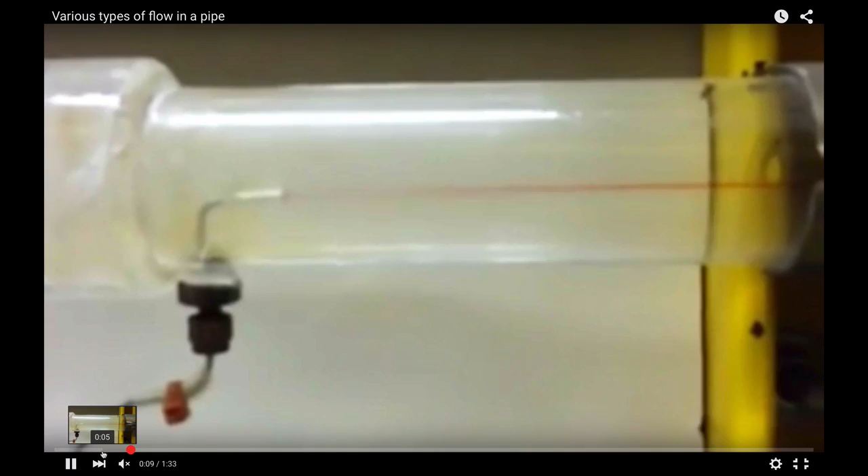Today we'll talk about pipe flow, which is what's going on in the background here. If you look at flow along this pipe, initially the flow at some velocity is laminar—sheets of flow sliding next to each other, uniform in the center of the pipe. As you increase the velocity and get further downstream, you get little wiggles in it. This happens because the velocity is increasing and the flow is going from laminar to a higher velocity, and therefore a higher Reynolds number, at which point it transitions from one flow regime to another.

And so that's what we'll be talking about. We'll be using the information you've gathered over the last two weeks, which I think covers two particular areas.

The two particular areas are the energy equation, which is a modification of Bernoulli, and dimensional analysis. We'll use both of these concepts today when we talk about flow in pipes, to develop expressions that let us solve for what power you have to put into a pipe network to get a fluid from the Gulf to someone's kitchen in New York City—what kind of energy you have to put into the system to do that.

So let's talk a little about this. We are in week 10. This is pipe flows. But first I just wanted to recapitulate—which is what recap is short for—on the two things we talked about.

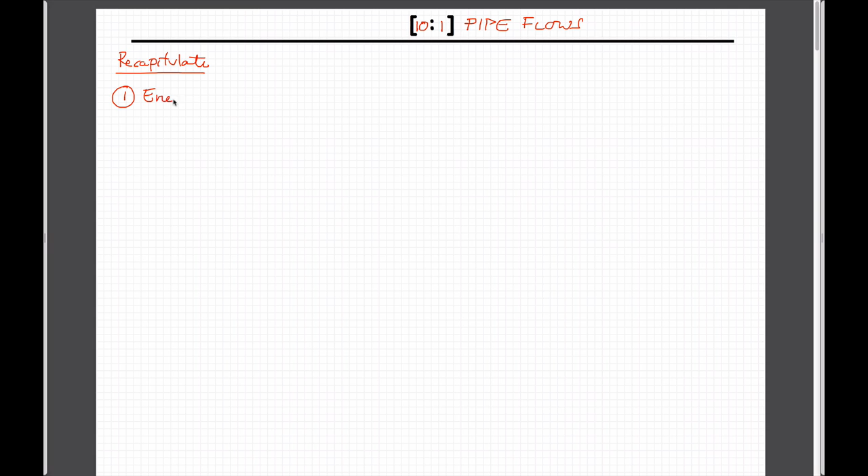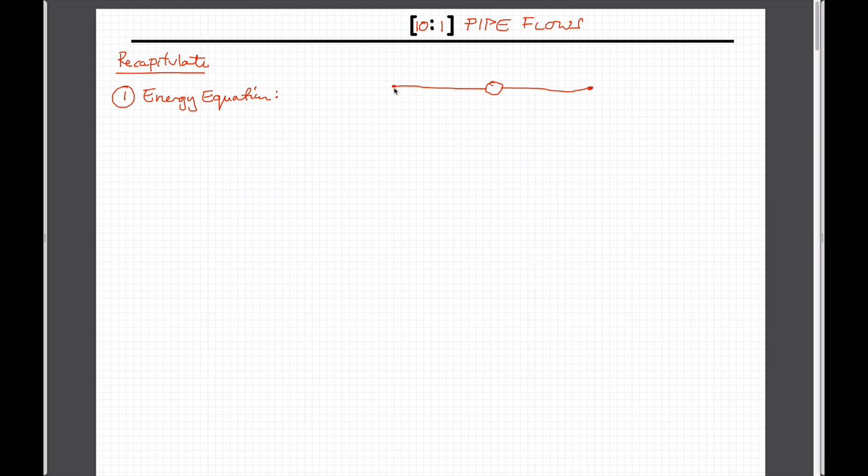The first is the big picture: the energy equation. It comes in a variety of forms, but the one we'll use most usefully is to go from upstream to downstream. Of course, the pipe network could have all kinds of things in it, like a pump, as it goes from upstream to downstream. By convention, I always have flows going from left to right—I don't know why, but I do. And the idea is simply this.

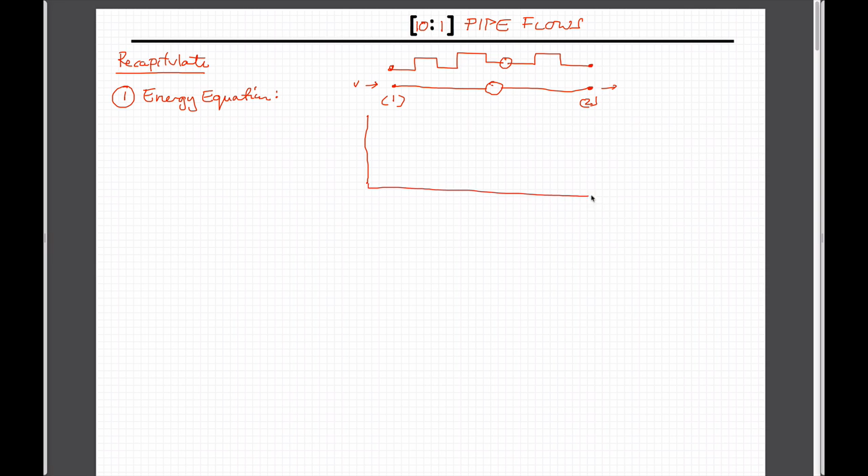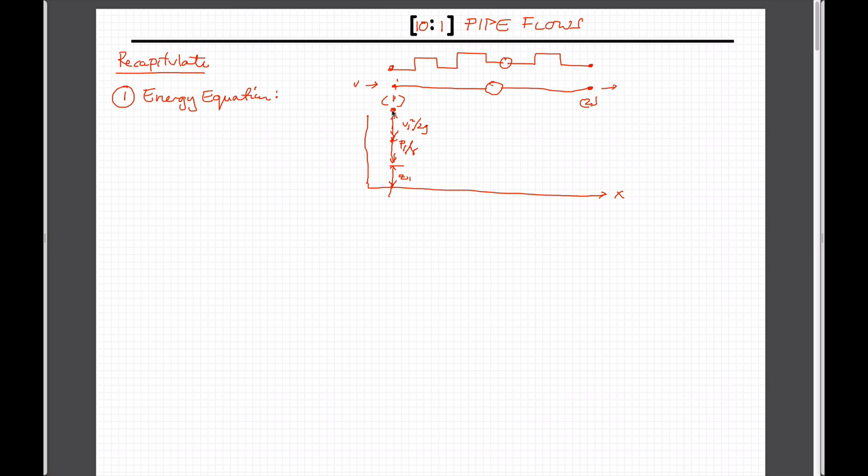We talked about this concept before. If you look at a length in the x direction, at this point there is a portion of the pipe which is an elevation, a portion which is pressure head at point 1 over unit weight, and a portion which is velocity squared—v1 squared over 2g. We know all these terms are units of length, and this constitutes Bernoulli's expression.

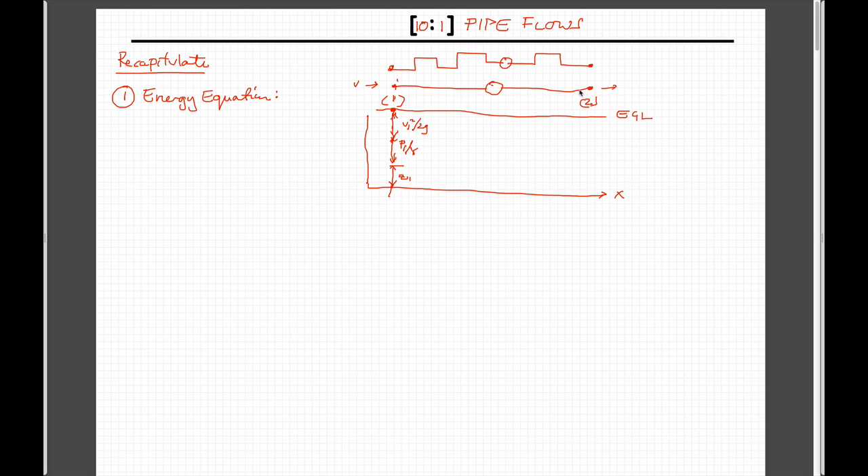We talked about having an energy grade line, which is constant in magnitude. Now if we come to this downstream point, the elevation will be the same magnitude, Z2. The pressure may be different, presumably so if it's flowing left to right—P2 over gamma. If the pipe is the same cross-section, so V1A1 equals V2A2, and both cross-sectional areas are the same, then both velocities have to be the same. So this height of velocity has to be V2 squared over 2g, and this length and height have to be the same.

But if we're pushing fluid downstream, we're losing pressure as we go from upstream to downstream, so P2 would be less than P1. The missing component in this is what we've called the loss. That's the graphical view of this. So if we write Bernoulli's equation as we now know it: upstream elevation, upstream pressure, upstream velocity.

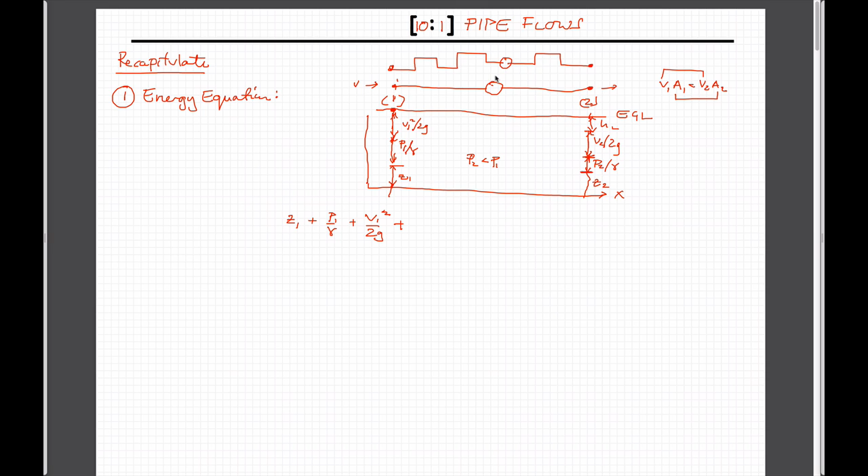We can put some energy into the system with a pump. The units of this have to be head, just like all these other terms. And if we look downstream, it's just the continuation of this: P2 over gamma W plus V2 squared over 2G, plus the sum of head losses.

And so the graphical explanation of these are frictional losses. So these are what we'll refer to as viscous losses.

That's why people put friction reducer in well bores, so that the pumping you apply at the top of the well bore when doing a hydrofracturing job is manifest at the bottom of the hole, instead of all being eaten up physically moving that fluid at relatively high velocities along the downstream portion of the pipe. So if you can reduce the friction, reduce the viscosity, you get much more pressure downhole, and therefore much more bang for the buck in some respects.

But that's physically what it means. And we won't talk about what HP will do here. I guess it would change the form of this grade line, but let's not worry about that.

So that's the first thing relevant to what we've done. We've solved for energy, and now for the first time, instead of dealing with Bernoulli's equation, which is inviscid—remember that Bernoulli is inviscid, in other words the viscosity is zero—by adding this term, we can allow for the fact that viscosity is no longer equal to zero.

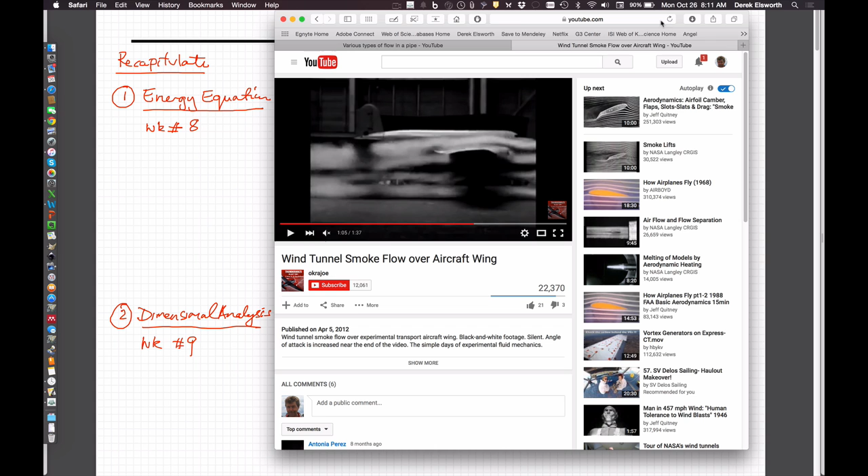And of course, dimensional analysis is this incredibly powerful method by which, if this works—this is one of the movies that maybe you looked at—will it refresh? Is that you can put a structure, so you don't need to solve any equations to figure out exactly what the forces might be on a structure. But what you could do is an experiment by towing a ship in a tank, putting an airplane in a wind tunnel, and being able to measure some forces on it.

So in this case, maybe with the air flowing past it, there are two things we'd be interested in. The first is that the flow patterns around the wings—we'd like to have the same flow patterns around the wings in this wind tunnel as happen in real life. And so there's something called kinematic similitude that we want to guarantee: exactly the same flow patterns around them.

And if that's the case, then we could measure the forces applied on this plane, either in lift or in drag pushing it down the tunnel, and be able to scale those up to the fact of a full scale. I don't know what scale this model is, or whether it's actually a full scale plane. We could use it to be able to scale what the forces would be in reality applied to this.

And so we don't need to solve any expressions to be able to do that. We can just use this quite incredibly powerful technique called dimensional analysis.

And I don't know if you can hark back that far in our past, but the very first time we met—actually the second time we met, I think on the first Wednesday—we talked about using Bernoulli's equation, and we talked about taking some of the individual components of that. We talked about taking these two components, and I'm going to mark one of them to put it on the top.

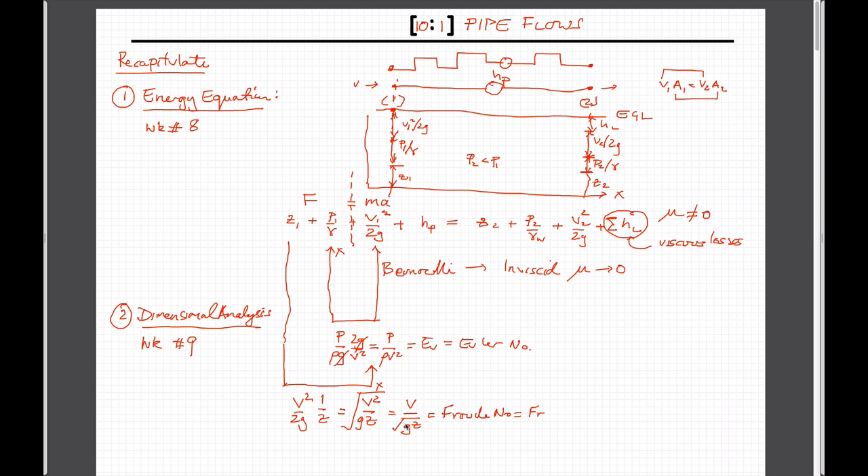So those are two of the terms that we'll work with. The other one is not so easy for us to do. If we take this inertial term and go over to this term here - not a very straight line - this is an inertial term, and this is viscous losses. The other expression we've talked about in this class is the Reynolds number, after Osborne Reynolds.

And the Reynolds number is the ratio of inertial to viscous forces. So we're still recapping stuff from last week - inertial forces to viscous forces. We don't really know what these viscous forces are. We know that the units of this have to be units of length, but we don't know what the other components are. But we do know what these components are.

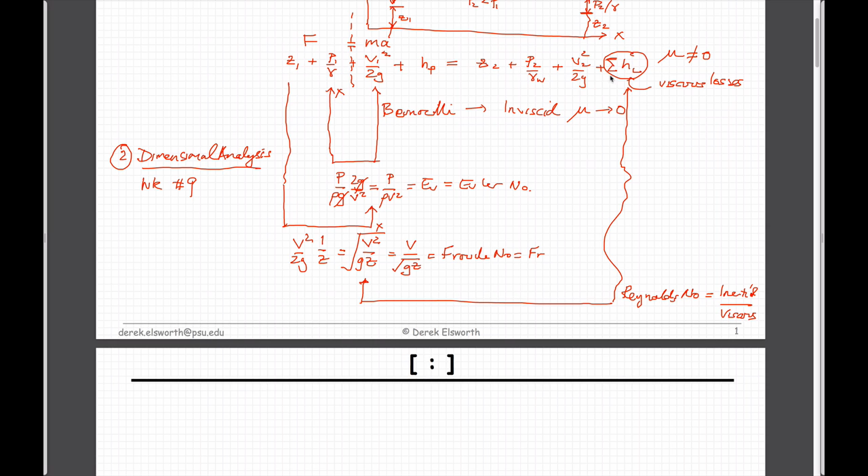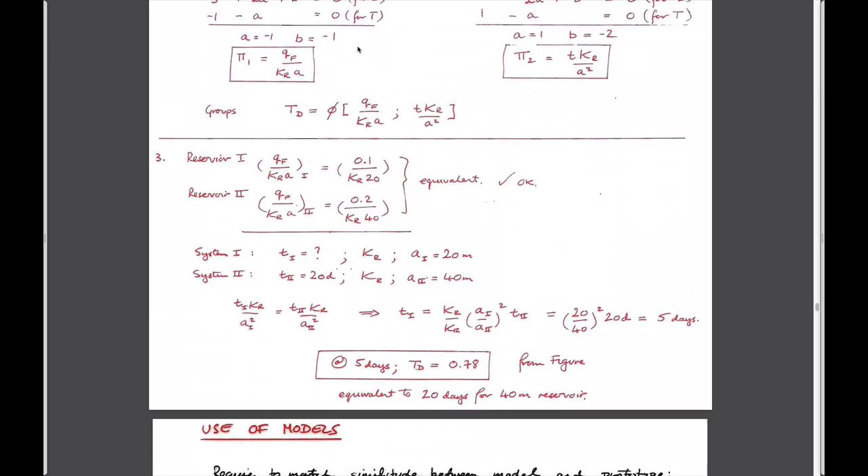So one easier way for us to do that is to just go back to here. Let's look at this - go back a few pages. More than a few. There, right there. Is this.

So we're interested in figuring out exactly what the Reynolds number is. We said that the Reynolds number is the ratio of inertia to viscous forces. The easiest way to figure out exactly what those are is just to look at what these would be.

We know the force due to inertia is F equals ma, mass times acceleration. Mass is equal to volume times density, by definition. We care about the units, not the specific components. Volume has units of length cubed, and acceleration is meters per second squared. So this is the product of a volume and an acceleration, and the units for this end up being density, length squared, and velocity squared.

If we look at viscosity, the easiest way to define it is through Newton's law of viscosity: shear stress is equal to viscosity multiplied by a change in velocity over a length. If we multiply both sides through by some area, then this now is also a force. So if we have a force here and a force here, we can divide those forces by each other. Taking the units, this is viscosity times velocity divided by a length.

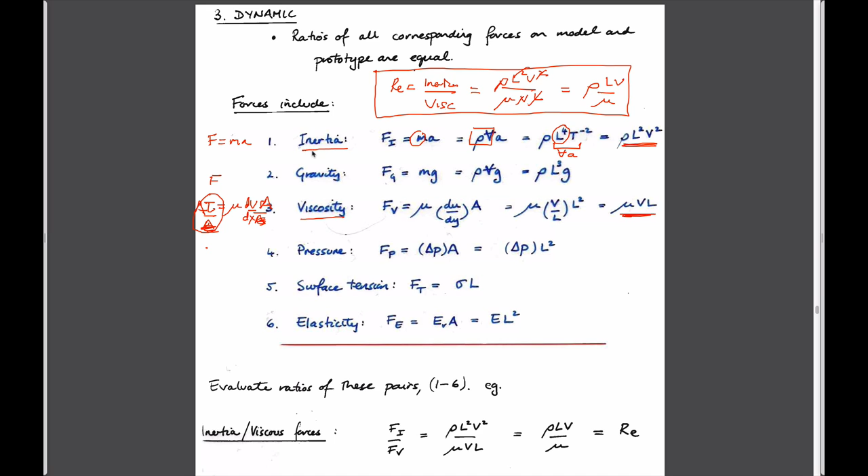So without going into much sophisticated detail about what H sub L is, we now know this other indexing parameter is just the ratio of the inertial term, v squared over 2g, to whatever the viscosity term is, which we've never really discussed in detail. It's a bit convoluted, but we can figure it out from Newton's law of viscosity. If we define these both as forces and divide one by the other, by definition a force over a force is dimensionless, and therefore we end up with the Reynolds number. So this is the other important number we have.

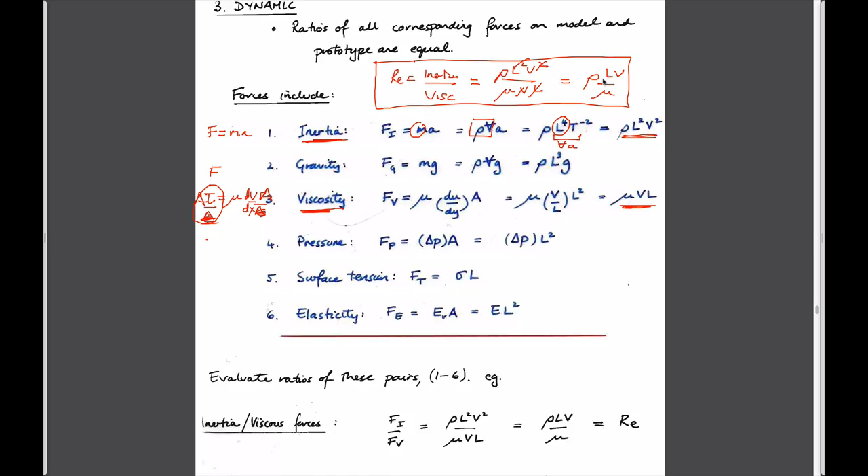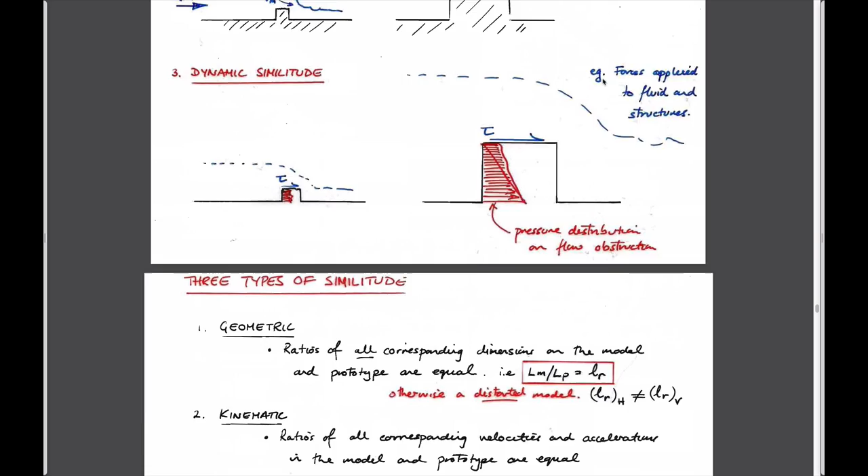So the final portion, maybe recapping what we've talked about so far — I'm going to use the figure we have here. We'll use this in our study of flow in pipes. To get any solution by this method of similitude, by running experiments in a wind tunnel — sometimes with buildings in it, sometimes with bridges to look at natural resonant frequencies like the Tacoma Narrows bridge, or to look at wind turbine blades, whatever you want — we have to satisfy three requirements.

The first is geometric similitude. In other words, the length to height ratio of the model has to be the same as the length to height ratio of the prototype, not protocol. If it's not, then it's not really a true model of what you're dealing with. You know that when you make a 1-to-50 scale model, everything gets shrunk down by that same dimension, and it looks exactly the same as the real thing but in miniature. So the model has to be shrunk in all dimensions the same as the real system.

The second is kinematic similitude, which means the flow patterns you get around it have to be exactly the same. First, you have the same shape, satisfying geometric similitude, because the prototype and the model are an exact scale replicate of each other. But now when flow goes around it, you want the eddies here and the eddies here to occur under the same conditions.

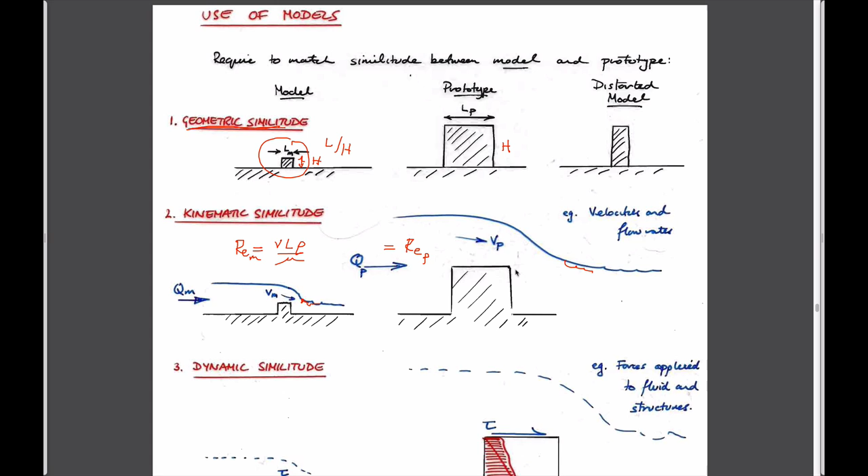In the model, that is satisfied if the Reynolds number of the model, which is velocity times a characteristic length times density divided by viscosity, is equal to the Reynolds number for the prototype. It doesn't mean all of these dimensions have to be the same, just that the combination of all those components have to be the same. If this is met, then the flow regime you have will be identical.

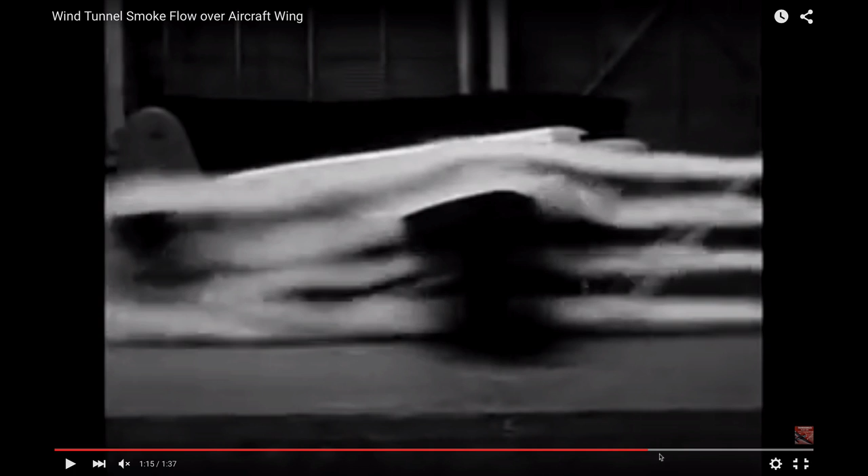Coming back to this pipe here, or this model here for that matter, let me go back to this.

So what this means is that the flow patterns we have going over this wing are specific for a particular velocity and the viscosity and density of the fluid, so it's air in this case. We could do this in water just as well, and so long as the Reynolds number was the same for this system in water or air, the form of these flow patterns around this wing would be identical. For that reason, we could measure the forces applied to this and use those to calculate the real forces applied on the structure.

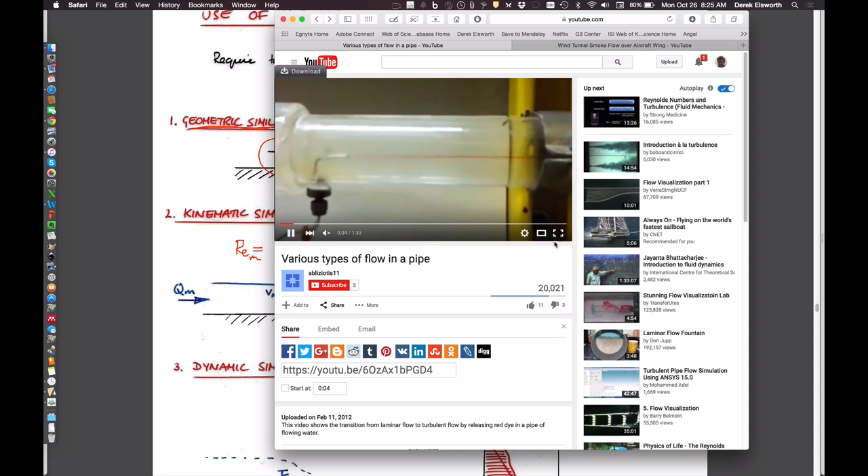Likewise, when we talk about this other case, let me go back to this one, since it's relevant to what we're talking about here. In this particular case, because we're talking about pipe flow, this flow is a laminar regime. There are no eddies, it's going at a certain velocity.

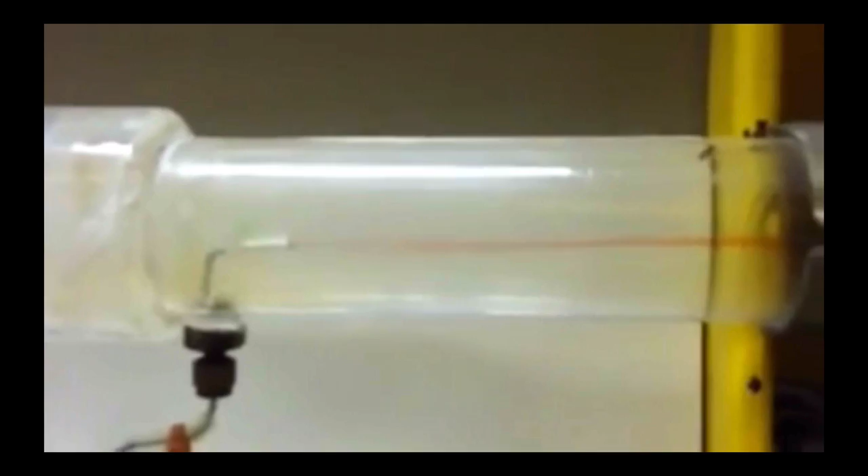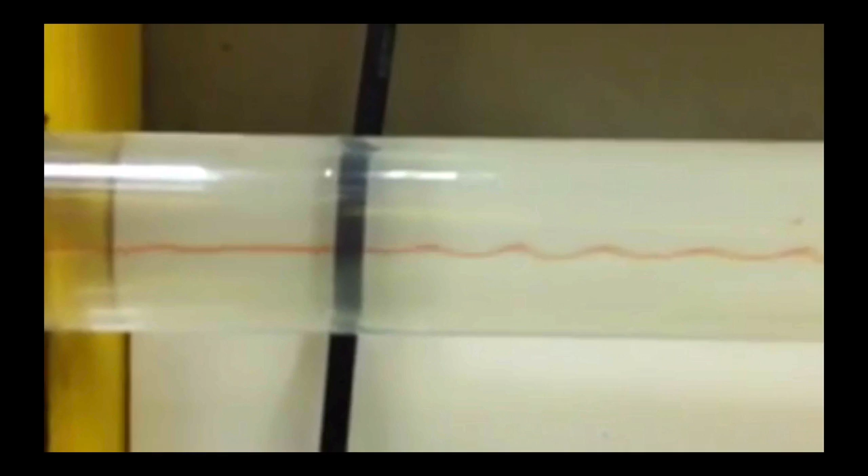Now if we increase the velocity, the Reynolds number is changing, because Reynolds number is a linear function of velocity. So the flow regime is changing. We might expect that the forces applied on the side of this pipe, which we never really think about since that's not what we want to figure out in pipe flow, would be changing because now the regime is changing. That's what we're attempting to do here.

So the final case: geometric similitude has to look the same, shrink down to the model. Kinematic similitude is the flow regime has to be identical, and that's guaranteed if the Reynolds number is the same. The individual length scale probably isn't the same because it's a model, and you could also use different fluids with different densities and viscosities, but so long as you scale the velocity appropriately to match this prototype Reynolds number, you have a match.

And the final one is dynamic similitude. Dynamic similitude says that the Euler number of the model, which we define as pressure divided by rho v squared, is equal to the Euler number for the prototype.

This is useful because now if we measure the pressure applied on this face, and multiply it by the area of this face, that equals a force. So if you measure the force, or measure directly the force applied to this block trying to move it downstream...

We could write this as: you measure the force here in the model. If you know the density, the velocity it's flowing at, and the area of this face, then because these are equivalent, this is equal to the force on the prototype divided by rho v squared times area, for the prototype.

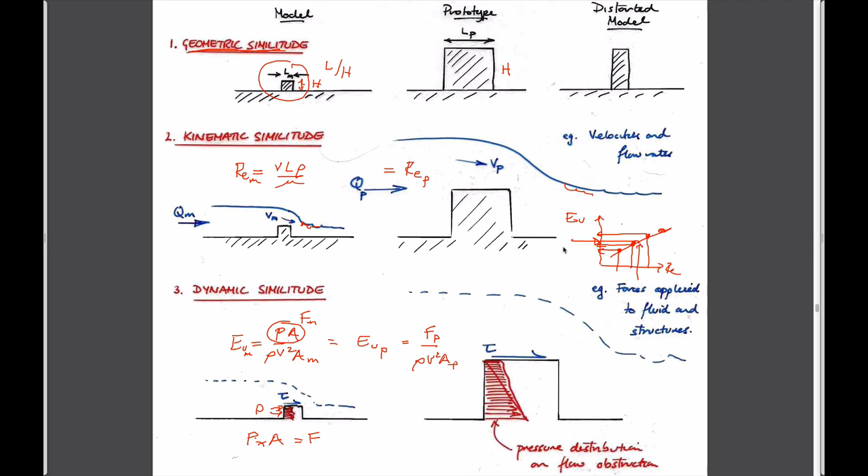That's it. So no equations needed, incredibly powerful technique, is used all the time because it deals with real fluids. It doesn't require that they be Newtonian fluids and satisfy Newton's linear law of viscosity.

Okay, so that's our recap, which perhaps took a bit longer than I wanted, but I think it's probably quite germane to what we're dealing with here. So what do we want to do now? We'll talk about pipe flows.

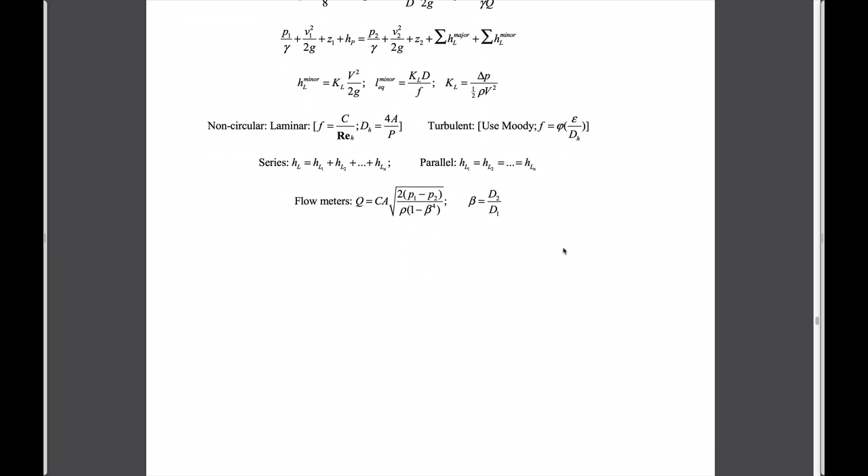So the last bit to tie this in together, and it does relate to this idea of dimensional analysis. What is a pipe flow, and how is it distinct from a storm sewer? It's important for us to realize that when we're talking about pipe flows, what makes a pipe flow is that the complete section of the pipe is filled with water.

And if that's the case, then it's driven by an upstream pressure, which is larger than a downstream pressure, which drives a velocity as a result of this.

If half the section of the pipe, or any fraction of the section, is filled with air, then it's no longer what we refer to as a pipe flow. It would be what we'd refer to as an open channel flow.

We can't now apply an upstream pressure here in the fluid and a downstream pressure in the fluid and sustain them, because it'll just short circuit through the air and we won't be able to sustain those pressures. So the only thing that will drive this flow in this open pipe, half section filled or three-quarter section filled pipe, is gravity.

So if it's horizontal, it'll be stagnant. If it's inclined, then it will be flowing. But the only force that's making it flow is gravity, the change in elevation between upstream and downstream. And that's different from pipe flow.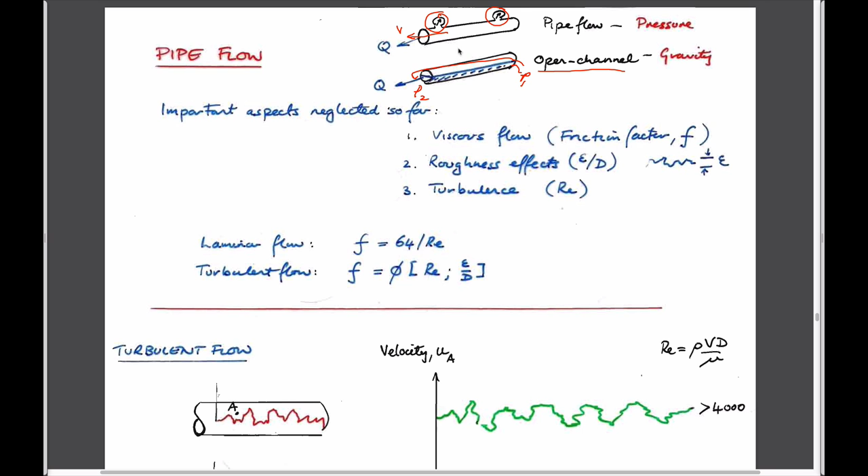So that's the one thing that's different for us, and we need to be able to account for that. Our interest in looking at pipe flows is to account for what is this head loss. This will be one thing that we want to figure out: what is this HL that we have to apply to be able to solve Bernoulli's equation for pipes?

How does it vary, for instance, with the fact that the walls of this pipe might not be absolutely smooth, but might have some roughness attached to them? We'll define this roughness in terms of some parameter which we'll call epsilon as a function of the diameter of the pipe.

And how, as a function of Reynolds number, which we know is a function of a velocity, a characteristic dimension that we can choose, and we'll choose that characteristic dimension to be the diameter of the pipe, a density of the fluid, and a viscosity of the fluid.

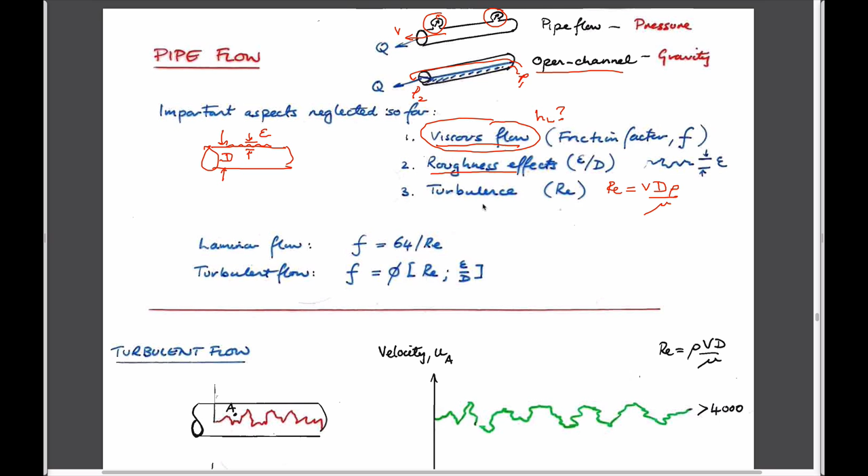How does this transition from laminar flow, where this little bead of dye that's going down the length of the pipe doesn't change? This was in our YouTube video. This was the first case at low velocities.

We upped the velocity, then all of a sudden there was a little jump and a wiggle in it, and if we kept on increasing the velocity, then it would get more of a wiggle. And we find out that this is indexed by this parameter of Reynolds number, which is this dynamic similitude parameter.

To get the flow regime exactly the same, we have to have exactly the same Reynolds number, not exactly the same velocity, but exactly the same Reynolds number. So that's kind of the big picture of where we're going.

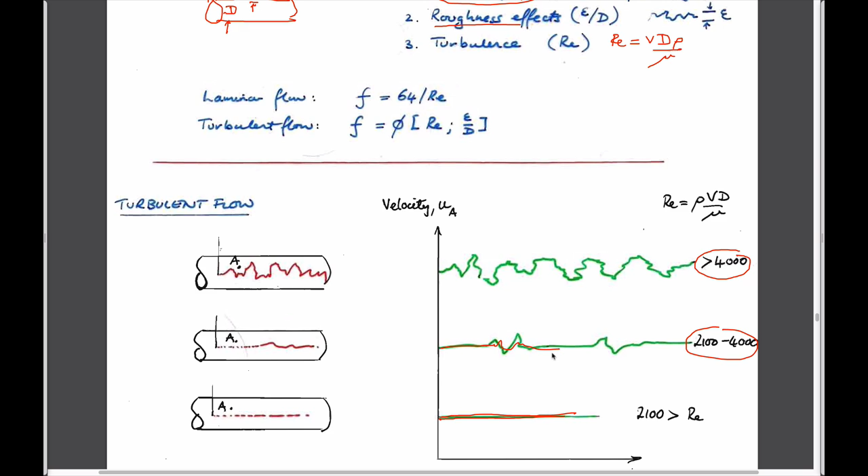I'll make one other point before we leave this, and I'm going to roll back just so I got a bit of place. So the big picture for what we're dealing with now for the next six weeks is we're going to talk about pipe flow, we're going to talk about external flows, and we're going to talk about open channel flows.

So with this territory, we can think of these as similar in some ways. If you think of pipe flow, we're often interested in looking at what is the velocity that flows through this pipe as a function of a pressure gradient, which would be P1 minus P2, the upstream, over a length of pipe.

And the flow is inside here. So you can imagine that since there's a change in pressure, P1 minus P2, and if we multiply that by the cross-sectional area of this pipe, that is equal to a force, by definition.

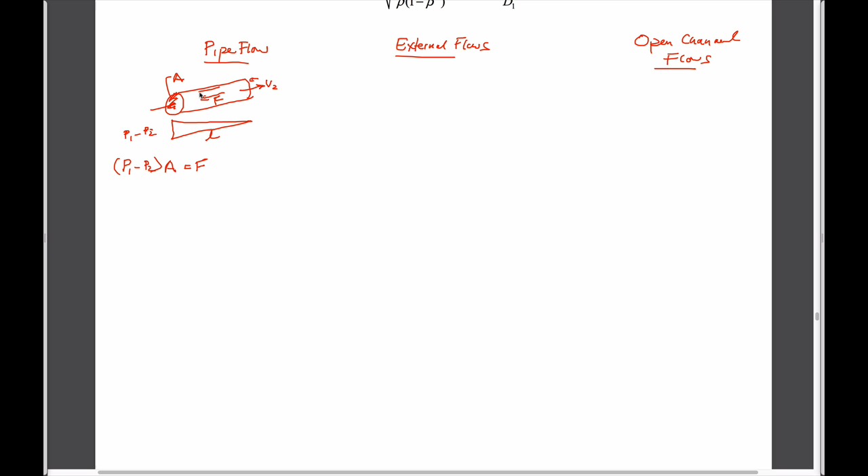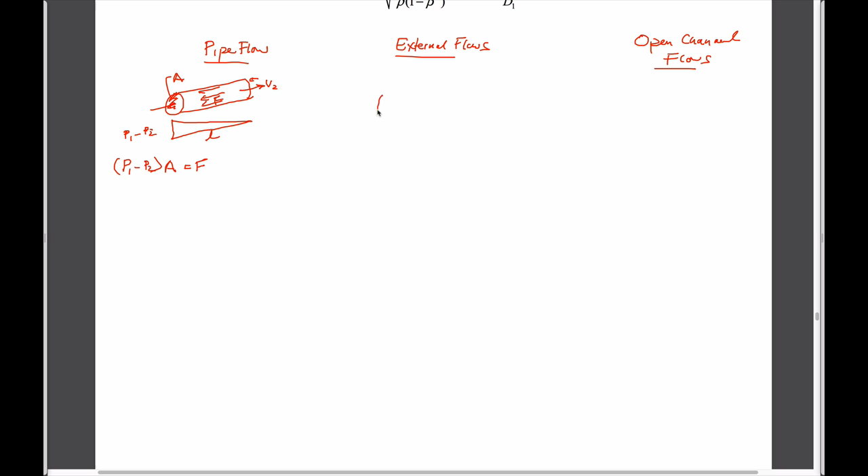And the reason we have to apply this force is because there are shear stresses that are applied on the side of this pipe which are resisting this flow. So to be able to hold this pipe in place, we have to think about the force that would be applied. If you think about it, if we're looking at external flows, this is now a pipe that instead of stuff flowing through it, we're going to close off the end.

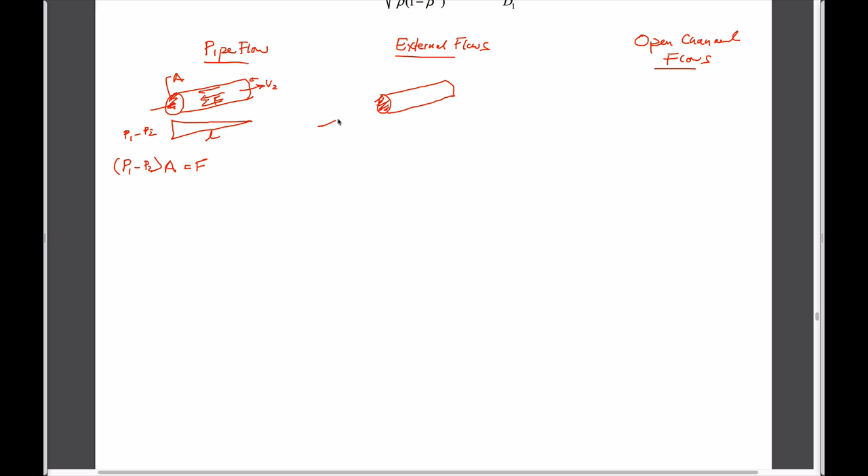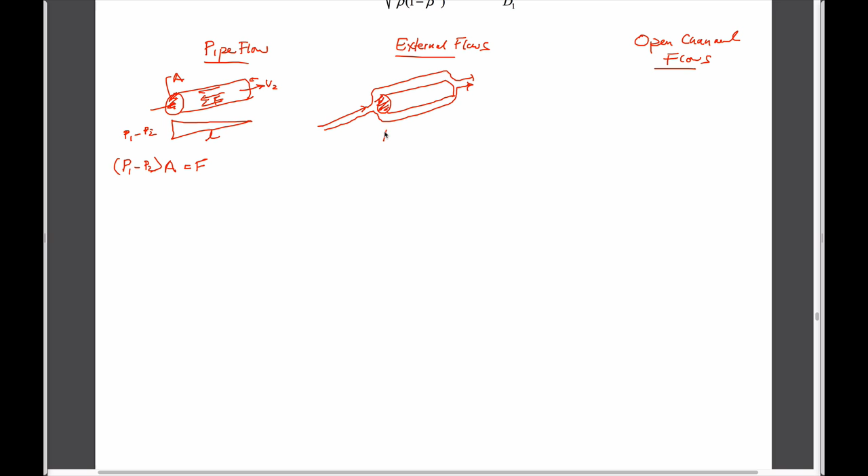If we close off the end, then the flow that goes down here has to go through a stagnation point around it and then out the other side, just like going around a wing. And maybe this is more apparent. There would be a different pressure here, upstream, a different pressure here, downstream.

And again, we can get a force that we'd have to apply to this. And the force is going to be equal to what? It's going to be the difference in those pressures, P1 minus P2, whatever those pressures are, multiplied by the end area. So it's actually no different from this. It's exactly the same.

So if we think about it, external flows and internal flows - we could call this internal flows if we wanted to - are really the same. The only thing is that we're interested in something else.

In internal flows, we typically want to know how much energy do we have to provide to be able to push stuff along the inside of the system at some given velocity.

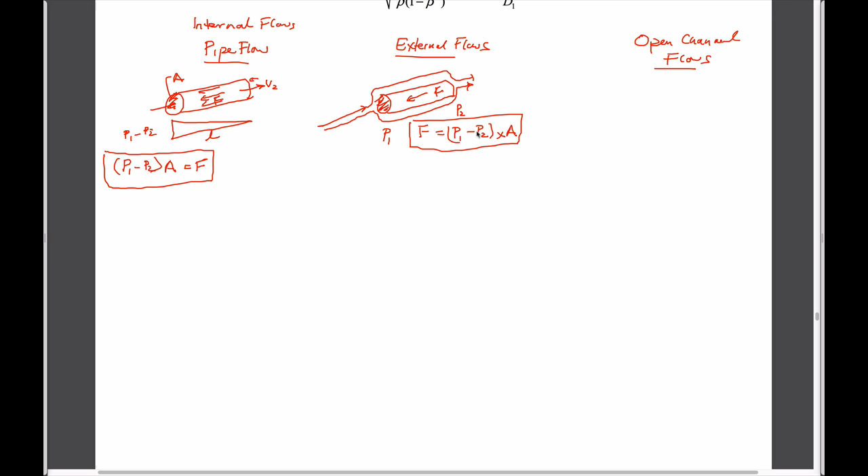In external flows, we're typically interested in if we have flow past this at some velocity, what is the difference in pressures upstream and downstream, so we can make it strong enough so that the water tower doesn't get blown over when it's sitting in a gale, which is really what's going on. And so we can apply these same things in terms of...

Dimensionless homogeneity. What did we call them? We called it dimensional similitude. We talked about kinematic similitude. And we talked about dynamic similitude.

So we can talk about the pipe first. So the pipe, what are our dimensions? We have a length to diameter ratio - we could think of as two length ratios. We talked before about the idea that we had a roughness here that we thought might influence things, and so we could also look at a ratio between the roughness and the diameter. These are both two non-dimensional parameters. They're both ratios of lengths, and therefore they have to have zero dimensions. And we could think of those as behavior defining the system.

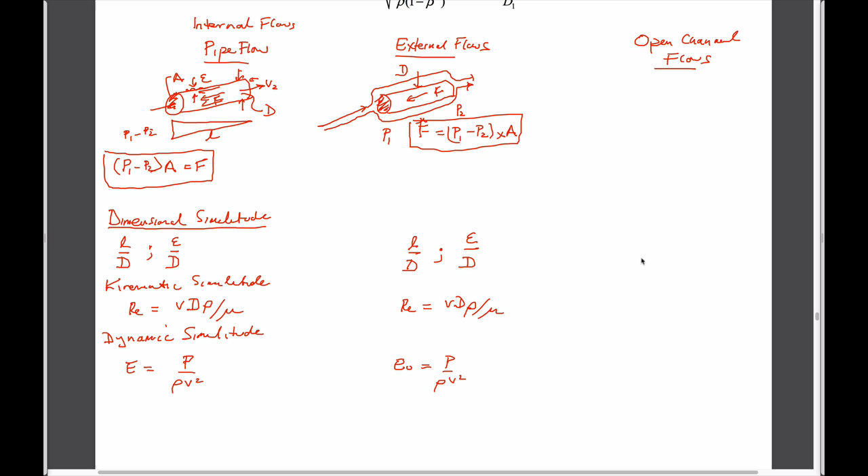In terms of kinematic similitude, this is again Reynolds number: velocity, a characteristic dimension, density, and viscosity. The Euler number has pressure divided by density and velocity squared. Exactly the same terms apply in this, and it would do in open channel flows. I guess open channel flows would be something that would be half filled.

It's slightly different because now, again, we have the same dimensions that might characterize the dimensional similitude. I'll just write them out, since I can. But what's causing flow in this particular case is not so much the fact that we have a pressure applied between upstream and downstream.

It's gravity. So although we would look for kinematic similitude to be the same, so that the model we would run to represent this has the same Reynolds number, if we're looking at forces applied here, because the flows are driven only by gravity, not by an upstream and downstream pressure as in the pipe case, then the Froude number would be the velocity of flow divided by gz.

With any characteristic dimension. This is a velocity, and this should be gravitational acceleration, which is length over time squared times length, so it's length squared over time squared. Square root of length squared over time squared is length over time, so they cancel out because they're both velocities. When we index these behaviors, we use the Froude number to do that.

So in a big picture way of dealing with this, that's where we're going. This is weeks 10 and 11, talking about pipe flows. This is week 12. I think your presentations are in week 13, and this is week 14. But they're all tied together by the same concepts really, so they're not really different.

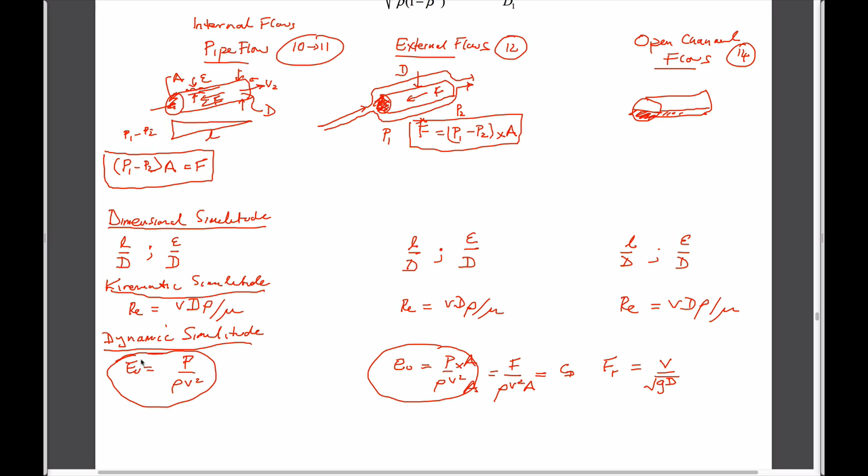It also applies when we're talking about internal flows, because internal flows are no different. It's just that the drag between the pressure drop upstream and the smaller pressure downstream has to be resisted by something, and it's resisted by the viscosity of the flow on the walls of the pipe. So when we're talking about pipe flows, we're also solving exactly for Euler number to solve for our system.

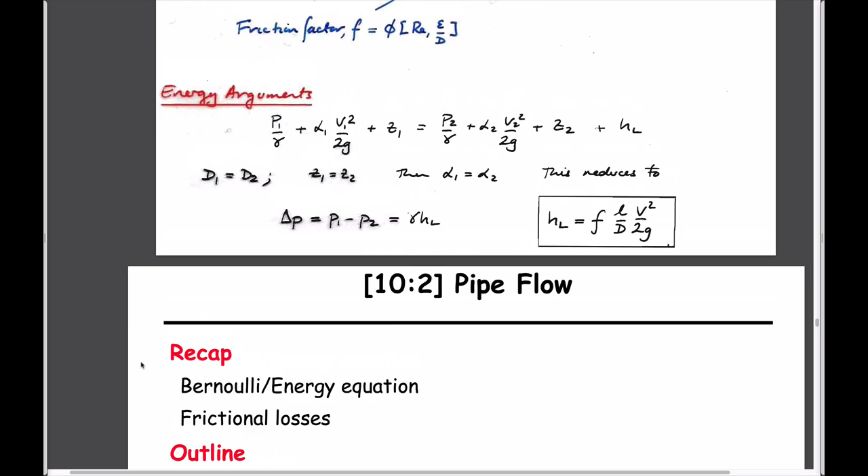So I probably went on more than I needed to, but that's fine. That's what I do, isn't it? Yeah, let's cut to the chase. I was going to derive something, but let's not.

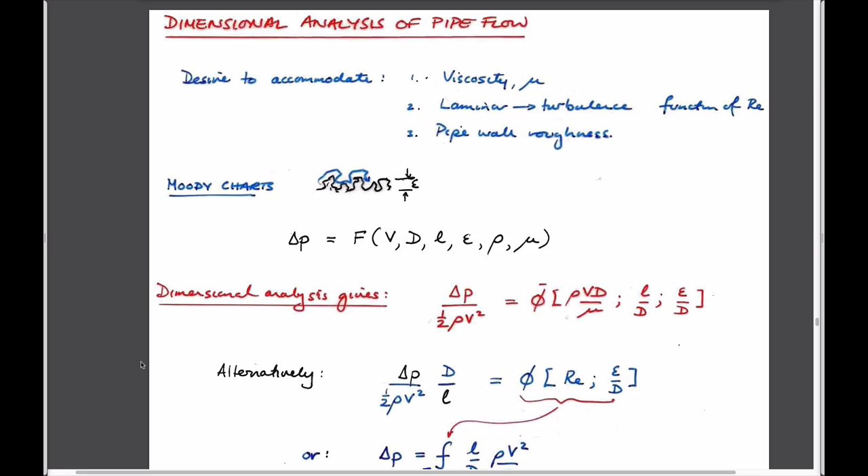Let's just use this. So this is the basic idea. Instead of deriving equations using Navier-Stokes equations, we could try to figure out exactly what the pipe flow equations were. In other words, we want to figure out exactly what this equation is. Bernoulli plus the downstream component, I guess I could put in HP, is equal to Z2 plus P2 over gamma plus V2 squared over 2G plus HL.

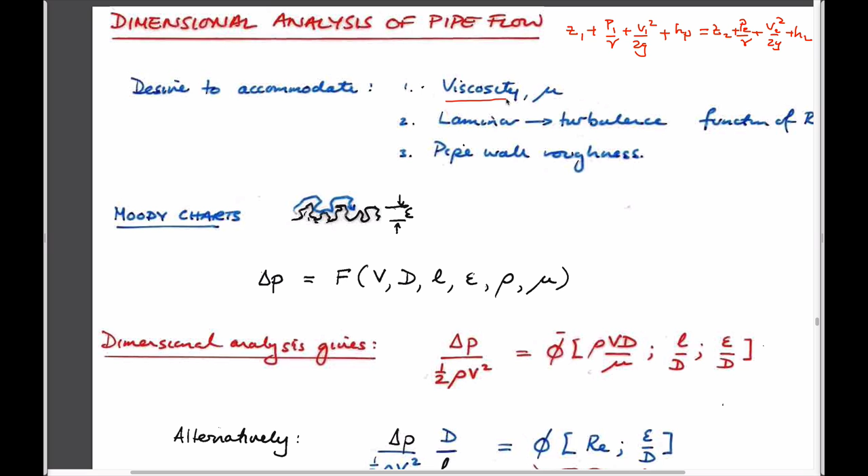So we want to figure out exactly what this term is. We don't want to solve any differential equations. We realize we want viscosity in it, so that's why we have this term. We don't quite know what this term means, but that's why we have it. We want to deal with not just laminar flow, but for all Reynolds numbers, and perhaps doing experiments at different flow rates would let us characterize the behavior. We want to include the effects of a rough wall, because it makes a difference if it's a smooth steel pipe or a concrete pipe with different roughness. In the same way we talked about a golf ball being dimpled, perhaps the walls inside a tube might make a difference if they're dimpled versus smooth.

So what we could do is look at all the parameters which define our behavior. We've already said what those parameters are: it's a pressure change over a length, there's a diameter, there's a roughness here which we'll call epsilon, we have a density of the fluid and a viscosity of the fluid. And you could make the case that we should have gravity as well.

So if I got everything here, we have a pressure drop that's driving flow. It's a function of a flow velocity, a diameter of the pipe, a length of the pipe, the roughness of the pipe, and the characteristics of the fluids.

What do we know? We have 7 parameters. We have mass, length, and time represented: this is mass over length cubed for density, and we have a velocity, which is length over time. So we have mass, length, and time all represented. In other words, the dimensionless groups that we have would be 7 minus 3, which equals 4.

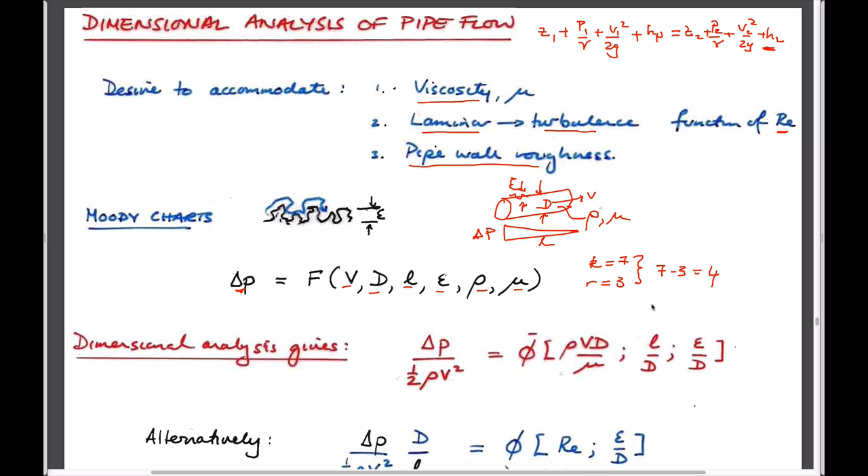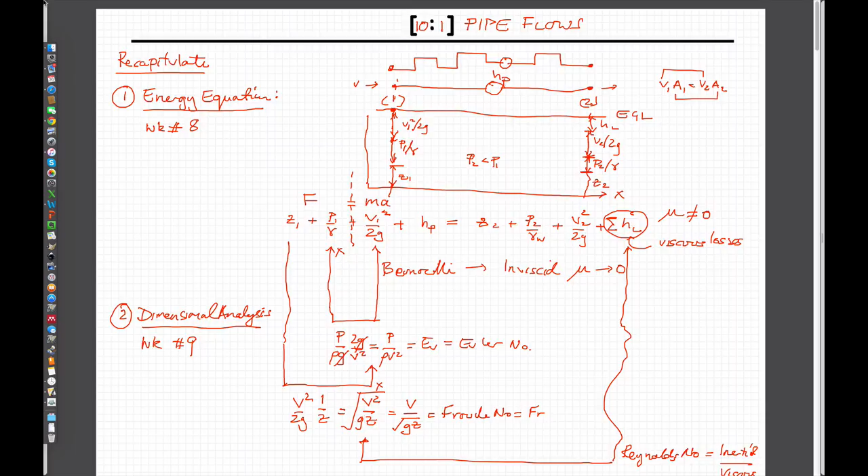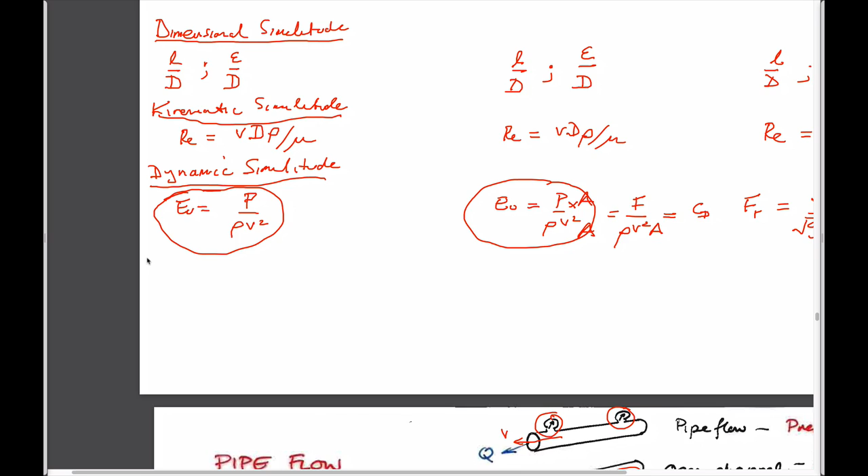So we could try guessing what those groups would be. If we go back to what we talked about before... actually, where is it? No, it wasn't there, I guess I was writing on here. If we go back to where we drew it, this is it. We talked about some dimensionless groups. We can guess them, or we could do it formally using Buckingham pi, which you know how to use.

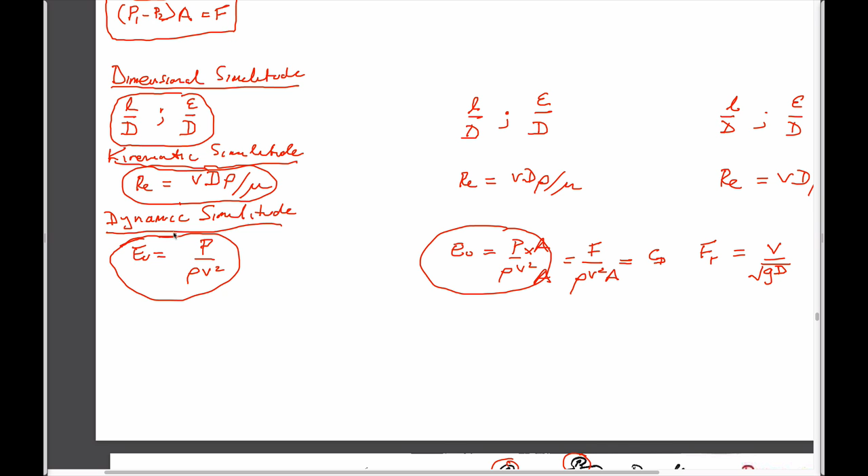But we could guess what those dimensionless groups would be. Let's guess that they might be these two, which are two dimensionless groups. Let's guess that it could be Reynolds number, which is another dimensionless group, and let's guess that it could be Euler number, which is a fourth dimensionless group. We said we needed 4. We're guessing that we could perhaps take those, and those would be good enough for us.

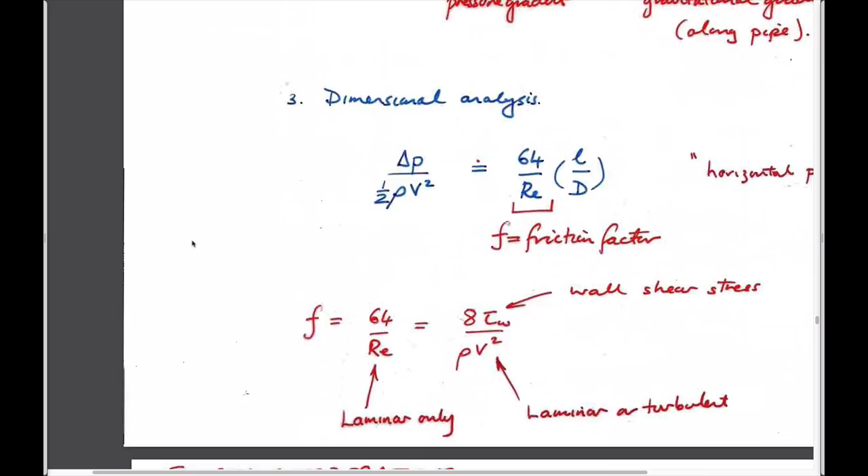So if we do this, we don't have to derive anything. This is the next page, I think. So we could write it exactly as this: Euler number is a function of Reynolds number, and this is a characteristic length dimension and a characteristic length dimension. We don't need to call them anything really, but those are the numbers that define behavior.

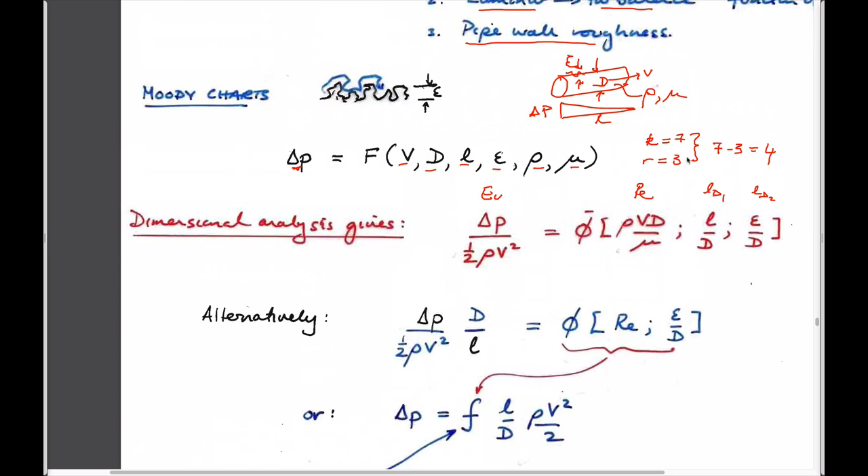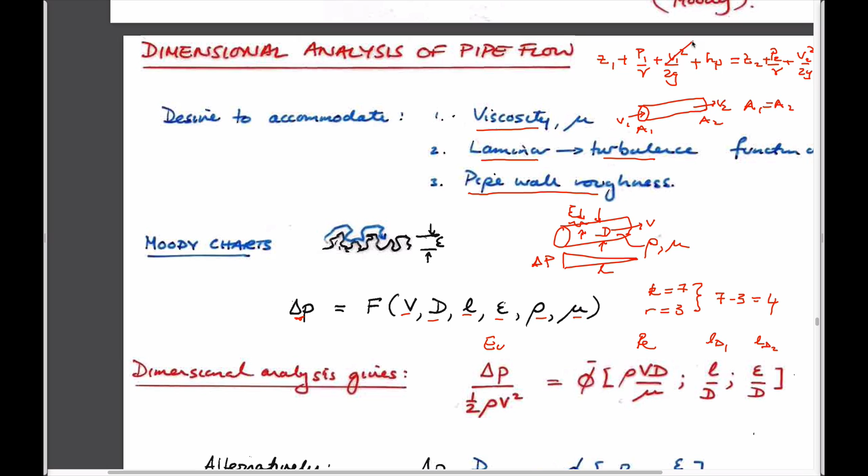If we go back to Bernoulli, and look at the upstream flow, we have a velocity 1 here and a velocity 2 here, and if the areas are the same, so if A1 equals A2, then by definition this and this are the same, right? They drop out. If it's on the same horizontal plane, then this and this drop out. If we're not pumping, then this drops out. And we're left with an equation which is P1 minus P2 over unit weight is equal to H sub L.

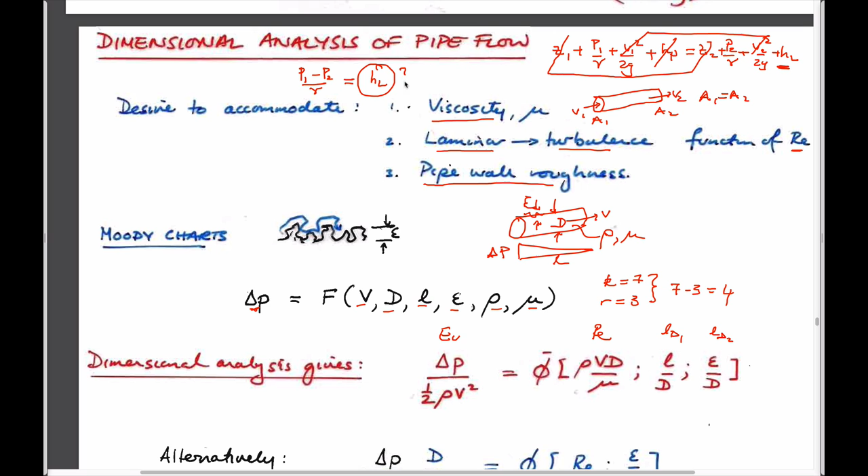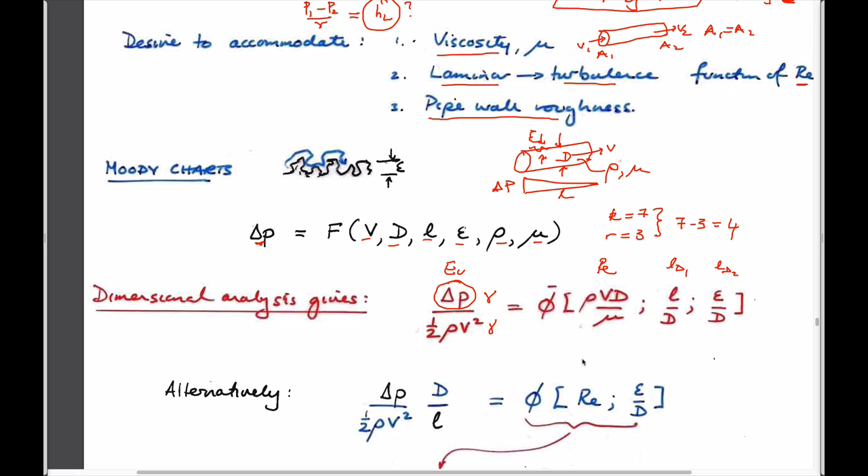This is what we want to figure out exactly is going on. We kind of have that, right? If you look at the bottom here, this is upstream pressure minus downstream pressure. I guess if we wanted to, we could divide both sides by gamma W, in which case we'd have that, multiply both sides by half rho V squared, and we'd end up moving this. Bottom line is it turns out that if we manipulate this, we end up with this final expression here. The pressure drop as we go from upstream to downstream is this.

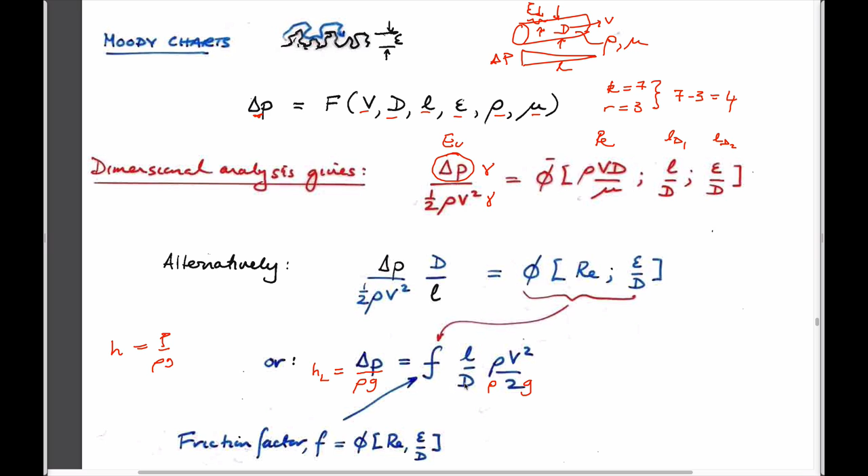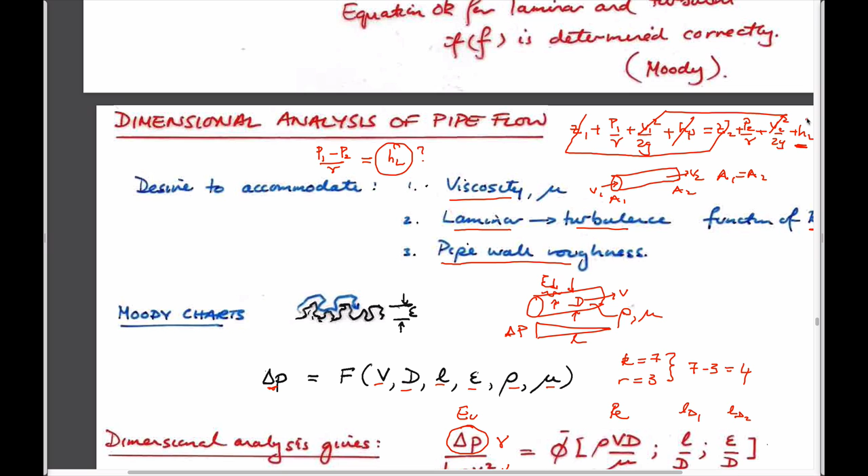If we divide it through by rho G... H is equal to pressure over rho G, right, by definition. So if I just take this and divide both sides by rho G, then this is equal to our head loss, which is a function of some factor, which is a function of Reynolds number and relative roughness. It's a function of the length of the pipe normalized with its diameter, and it's a function of these two terms - this velocity here and this velocity have cancelled out because it's the same cross-sectional area, but implicit in this term here is the fact that there's a term that's a function of the velocity squared term, the roughness term. And so this is the one term that we'll use in this class.

It says that this head loss, which is what we want, is going to be a function of some parameter, the length of pipe divided by its diameter, and how quickly the flow is going. This has no units. This, as we'll find out, has no units. This has units of length. This has units of length. And so this is the term.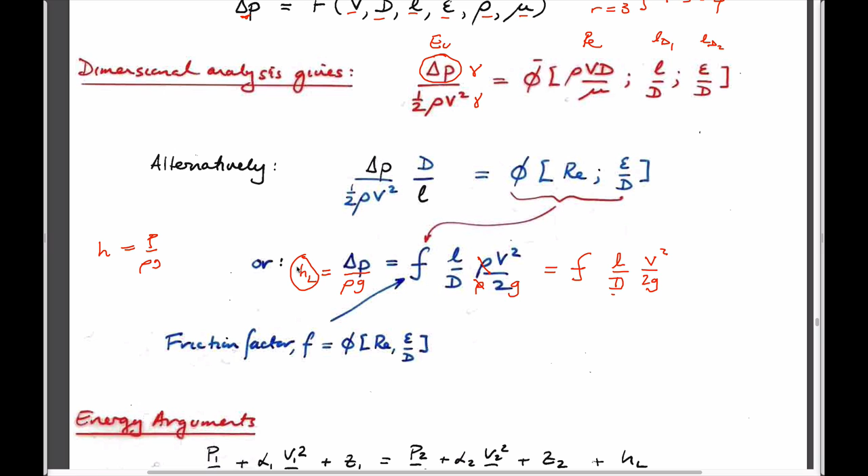So the only thing that we're going to need for this next 2 weeks is exactly an understanding of how to use Bernoulli's equation, which is this, that includes a term which might also include pumping, but certainly includes this loss term. And this loss term is very straightforwardly given by this expression here. It's a function of the velocity head and a function of the geometry of the pipe, length over diameter, and some friction factor. And what we'll find out is that this friction factor is a function of Reynolds number.

And we'll use what are called Moody charts, which give relationships for laminar flow and then turbulent flow. Doesn't matter. You'll see these many times.

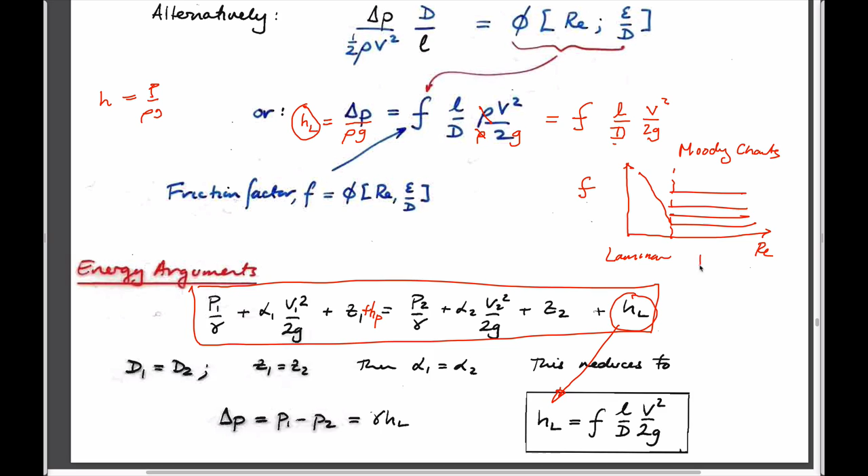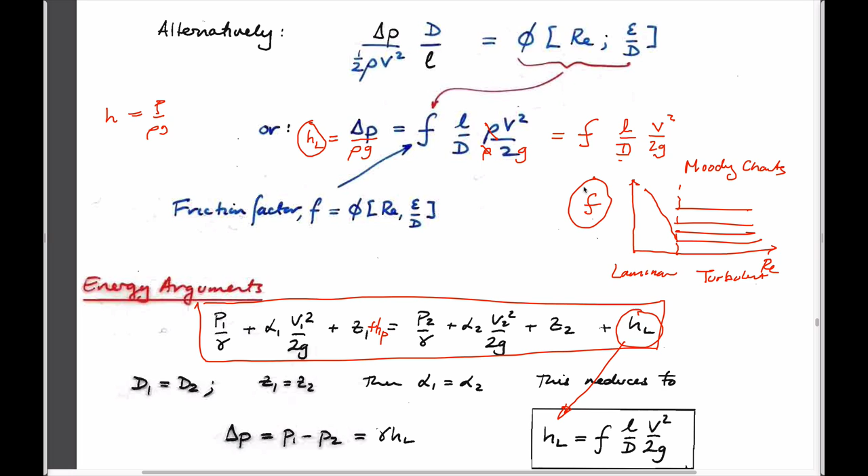And it allows us to calculate what is friction factor from never ever having solved an equation, never having solved a differential equation, but just by doing experiments. So you go in the lab, you take a pipe, has a certain roughness, certain length, you measure the pressure drop along it, and you're able to figure out exactly what this friction factor is. You plot a point. You do another experiment at a higher velocity, you measure the friction factor, the pressure drop between 2 points. From the Euler parameter, you got another point. You do it again at a different velocity, and you have a relationship. That relationship applies to every single pipe that you'd use, at every single velocity that you use, so long as you take care of these three requirements.

Dimensional similitude, kinematic similitude, which is code for the Reynolds number is the same, and dynamic similitude, which means that the Euler number is the same. And so hopefully you see that this is really an Euler number, this is a Reynolds number, this is a geometry, and this is a geometry, right?

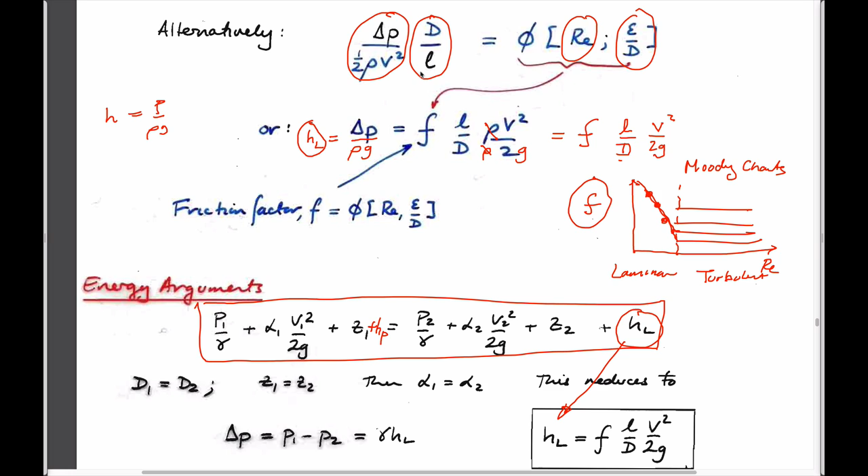Those terms. So, sorry, went over. Too exciting, this stuff, isn't it? Okay, well, we'll continue next time. I'm happy to take questions if you have any, but if you want to scarper as well, that's good too. Okay? Thank you.